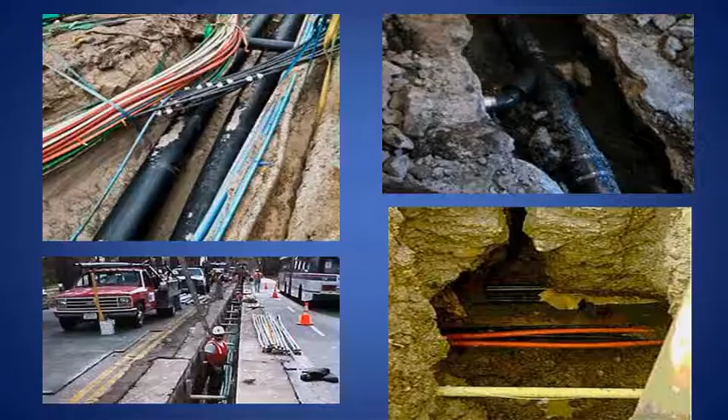The underground infrastructure is vast and growing, essential to all communities, providing essential services necessary for life, health, and social and business productivity. As the demands and needs of our society increase, so will our underground infrastructure.

So that leads us to: who's protecting our communities? Are we doing everything that we can? Are you doing your job? Most states have enforcement protocols to ensure compliance with the one-call codes.

In Iowa, the enforcement authority is the Attorney General's office. In South Dakota, the authority is the South Dakota One-Call Board. In Illinois, it's the Illinois Commerce Commission. And in Nebraska, the Attorney General's office.

In Iowa, enforcement allows the Attorney General to take any action necessary to enforce the penalty provisions of the Iowa One-Call Law. The following clip outlines the Iowa Attorney General's involvement in enforcing the penalty provisions.

One-call enforcement is one of the duties assigned by the Attorney General to the Environmental Law Division. We take this responsibility very seriously. When followed, the one-call law saves lives, prevents personal injuries, and protects essential utilities, property, and the environment.

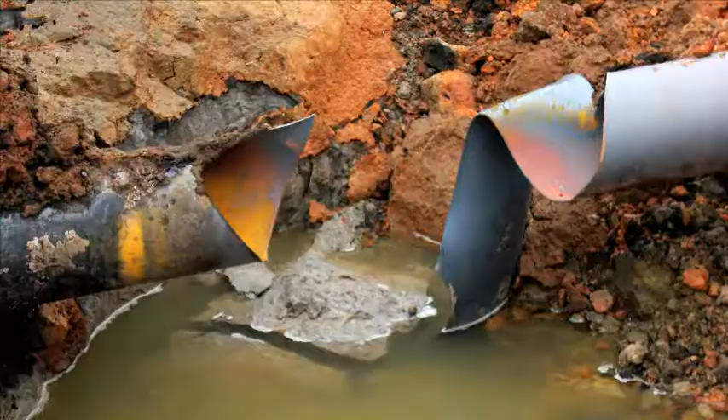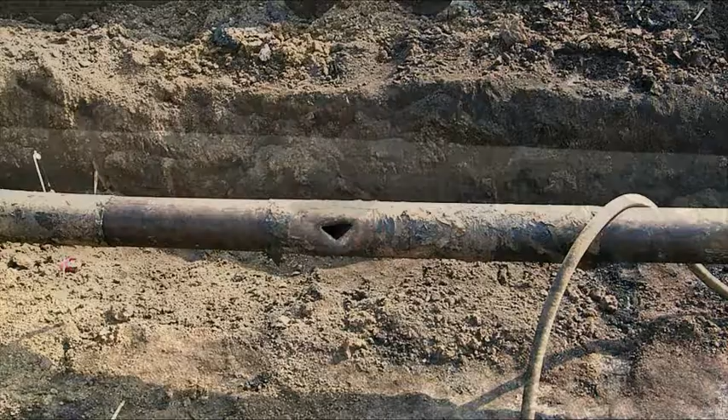Here is why we take this so seriously. One-call violations can have very real and tragic consequences, including explosion of a natural gas pipeline resulting in the death of one pipeline worker and causing another pipeline worker to lose an eye, causing severe burn injuries to an excavator and knocking out natural gas service for an entire city during repairs, causing a fire just outside an apartment building that contained a daycare center for small children, or damage to a hazardous liquids pipeline resulting in the release of thousands of gallons of gasoline near a trout stream and cleanup costs totaling more than $500,000.

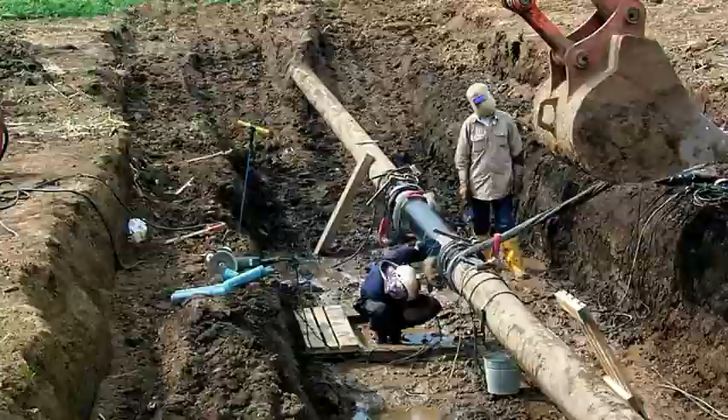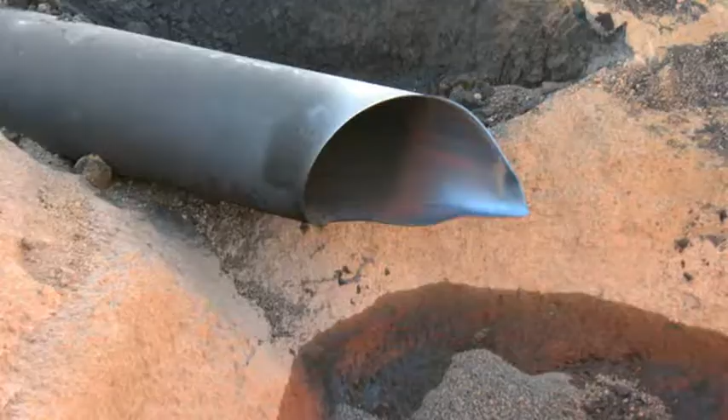Unfortunately, in 2012 we had two more tragic examples. On April 25, an excavator failed to provide 48 hours notice of excavations to install drainage tile in rural Plymouth County. The tile plow hit and ruptured a 24-inch diameter natural gas pipeline, resulting in a massive explosion and fire.

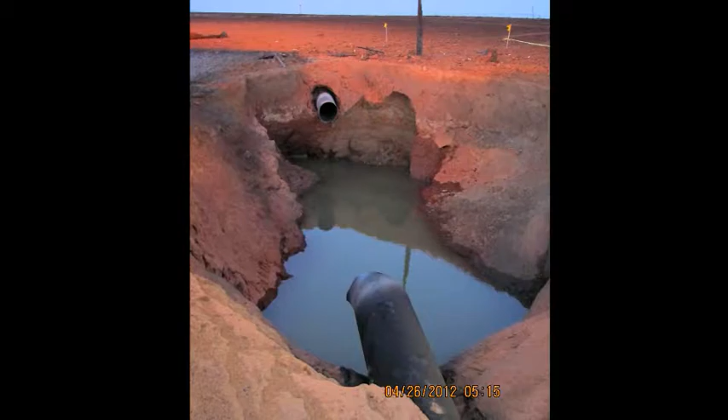This created a large crater 100 feet long, 35 feet wide, 30 feet deep, scorching 80 acres of farmland, destroying the tile plow and bulldozer, destroying an overhead high-voltage power line, causing substantial property damage to the pipeline, and injuring two employees who were hospitalized. One week later, the same excavator conducted another excavation to install drainage tile a quarter mile from the former site, again without providing 48 hours notice.

We filed suit, and the excavator paid the maximum civil penalty for the two days of violation, $20,000, and agreed to a permanent injunction.

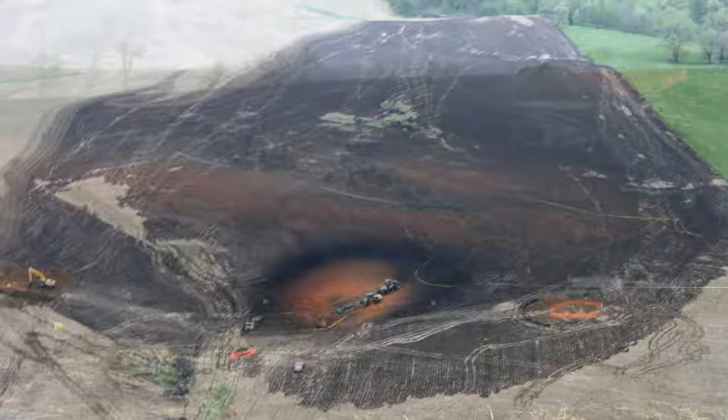On April 27, another excavator failed to provide 48 hours notice of excavations to install drainage tile, this time in rural Jackson County. The tiling equipment hit and ruptured a 16-inch diameter natural gas pipeline, resulting again in a massive explosion and fire, creating a large crater, scorching the farm fields, destroying the tiling equipment, causing substantial damage to the pipeline company. The two employees on site narrowly escaped injury.

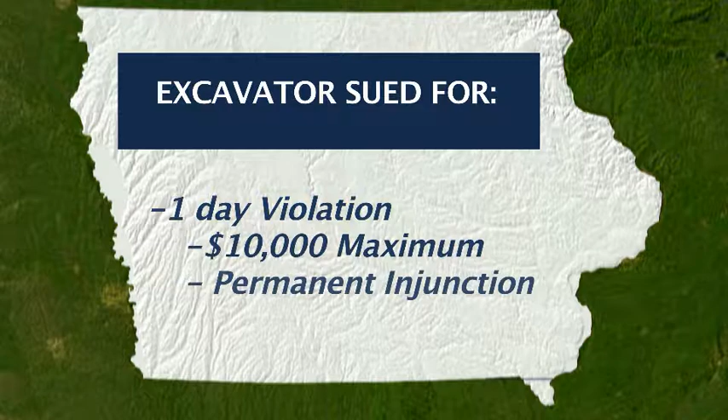We filed suit, and the excavator paid the maximum civil penalty for the one day of violation, $10,000, and agreed to a permanent injunction. These are just a few examples of the tragic consequences that can occur when excavators fail to comply with the one-call law.

We trust that most of you attending this important program are familiar with the one-call law and fully comply. Our only hope is that these brief comments will serve as a reminder to everyone of the importance of this law and the potential consequences, legal and otherwise, when the law is violated. The Attorney General's office will do its part as needed to ensure compliance. Call or be called. Thank you.

Each of the states that you work within take damage prevention very seriously. It's important to remind everyone just what it is that's at stake.

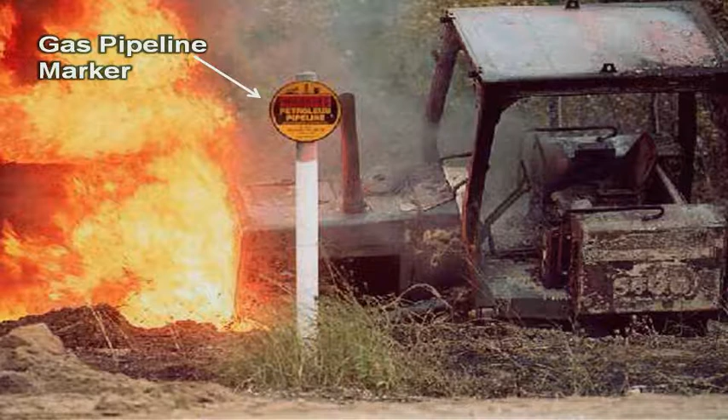Here we have a situation where there's a bulldozer in the same proximity as a pipeline marker. This should never have happened. When you get to the job site, slow down, pay attention, look at your surroundings, and be careful. Safety begins with planning, and it ends with safe protocols at the job site.

You play a vital role in safety and damage prevention, in safeguarding communities, in protecting life, health, and the environment, and preserving the essential services infrastructure. Protecting underground facilities means taking all the necessary precautions.

But the very nature of underground facilities is that they're buried. They're out of sight, they're out of mind. You can't see them. So it's imperative that we all understand the potentials, understand what types of underground facilities are in place, understand and respect the underground facilities infrastructure by being prepared and being alert. Literally, there's more than meets the eye.

In the following video, we'll take an in-depth look at one of our most essential underground services. Des Moines Water Works does about 30,000 locates every year, and we take every one of those locates very seriously because we know that every one of those jobs can result in a dig-in if we don't do it properly.

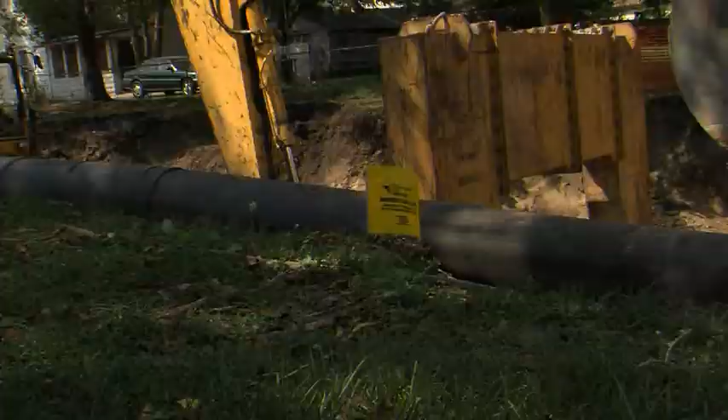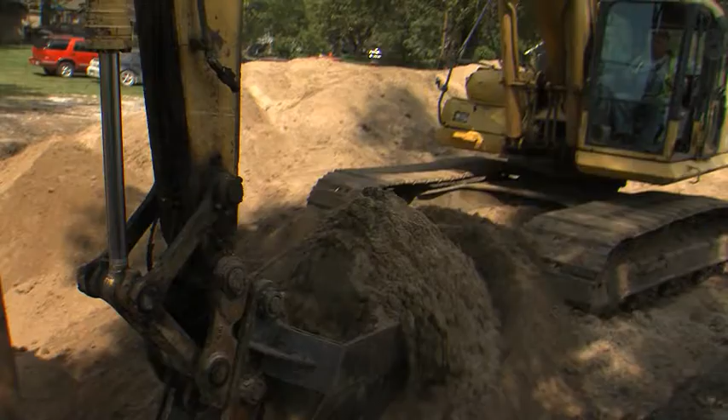Sometimes we have the impression that contractors have more respect for gas or electric markings because of the potential danger, or fiber markings because of the potential cost of the repair. But from our perspective, water should be one of the largest concerns because of the public health implications.

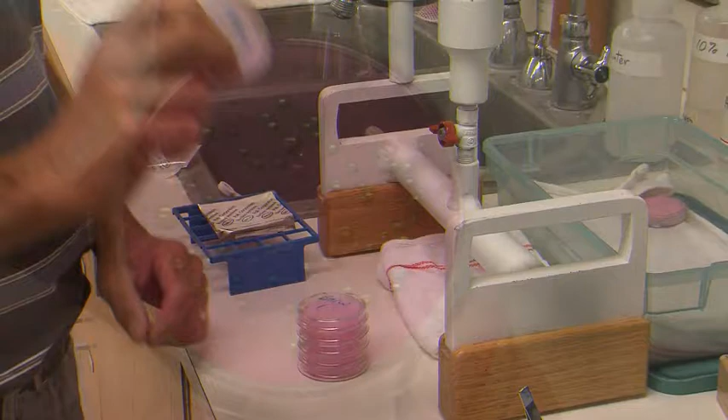Water is the only essential service that we deliver to customers that they actually consume. We routinely test water samples taken throughout the distribution system. What we look for is a group of bacteria called coliforms, of which E. coli is one. These types of bacteria are indicators of sewage contamination.

But the things that people don't always think about are the potential for contamination. If you dig into a water main and it fails catastrophically, it's very likely that contaminants are going to get into that main at that point when we shut it down.

More importantly, though, it's very likely that you're going to depressurize a large portion of the system, and when that happens, there's tremendous potential for backflow or back siphonage, which is actually drawing potential contaminants out of homes, out of businesses, through their service line by a vacuum effect on the water main, drawing those contaminants into the distribution system at points far from the actual point of contact.

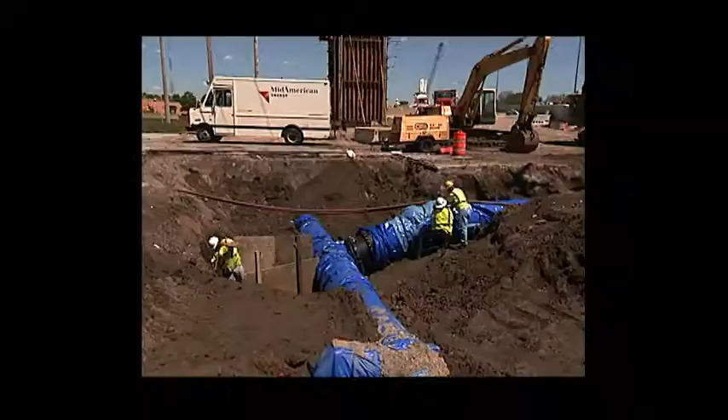The distribution system is a network of underground infrastructure pipes that are at risk at times due to activities within the distribution system. Once damage does occur, the primary threat is depressurization of the system and subsequent contamination that could occur.

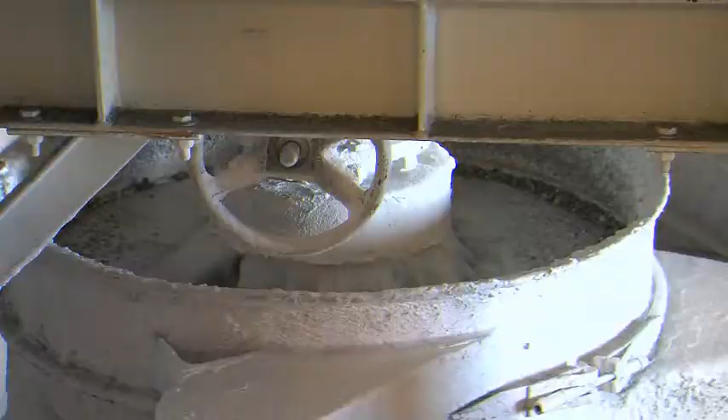Des Moines Water Works treats Raccoon River water as our source water, which is far from potable when we start with it. We put that water through one of the most robust treatment processes in the country because it starts out such poor quality.

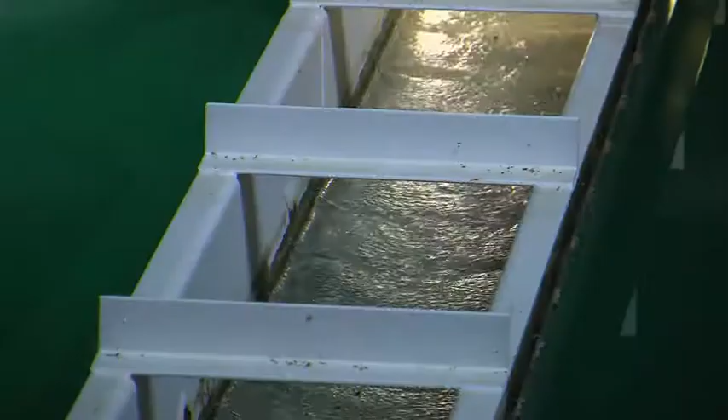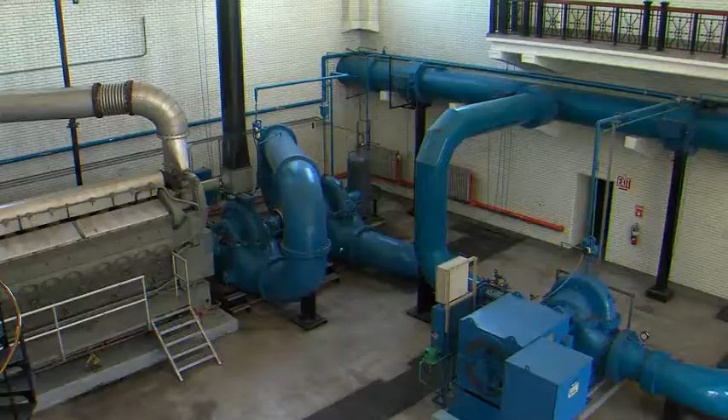We're standing inside softener number 1 at the McMullen Water Treatment Plant. Target pH today leaving the softener is 10.6. With a pH of 10.6, we can expect and anticipate an effective kill of microbiological activity. From a water treatment perspective, this is one of the final steps of the process. Treated water, ready for human consumption, is pumped from this facility into the distribution system.

That network of buried infrastructure has discharge pressure ranging anywhere from 105 to 125 psi leaving this station. Everything we do in the distribution system, from the design of the facilities to the construction, installation, operation and maintenance, the locating of those facilities for other contractors, everything we do is with the goal of ensuring the quality of the water when it's delivered to our customers.

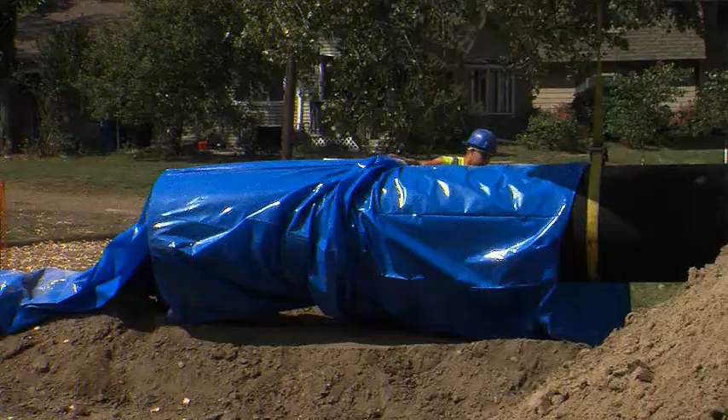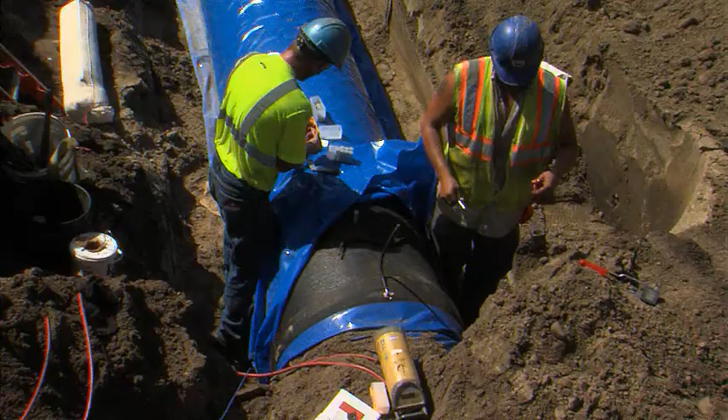We go to great lengths to ensure the life expectancy of our facilities. We use non-corrodable materials, we use polyethylene encasement on iron pipes, we use cathodic protection systems on iron or steel pipes to ensure that the facilities will last as long as they can.

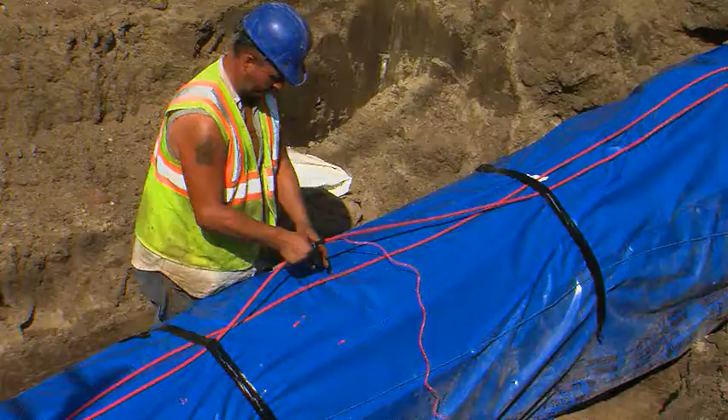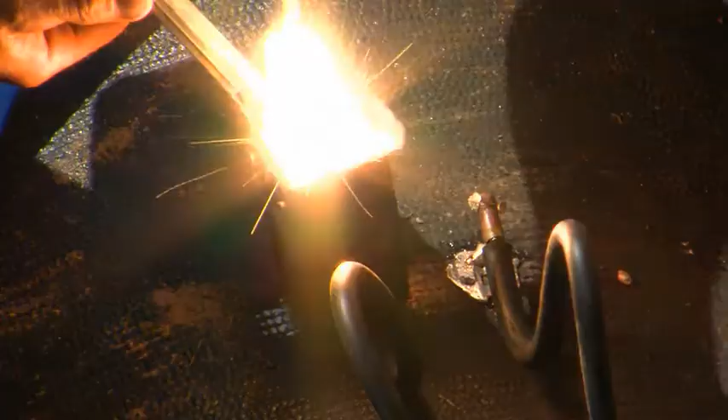When we install iron pipe, we cover every single inch of that pipe with polyethylene encasement to protect it against corrosion. In addition, we attach magnesium anodes to the pipe every so often to act as sacrificial metal in the ground to prevent that pipe from corroding. They actually weld the anode lead from every anode directly to the pipe using an exothermic weld process, just to ensure long service life for that pipe.

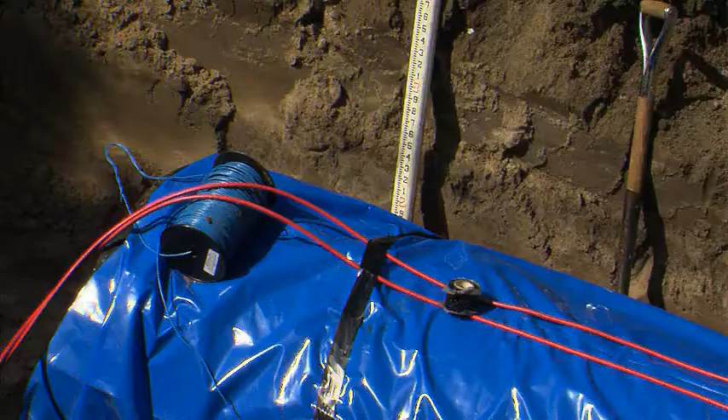If that poly wrap is damaged, if one of those anode leads is broken, it renders that system unusable and dramatically shortens the life of that facility. There are a lot of little things within that system that people might not even think about, like the tracer wire. It's not the pipe, nothing's going to leak if you break the tracer wire, but it makes it impossible for us to locate that facility the next time for the next person who's going to dig.

Water can be incredibly dangerous, especially if it's a large main and they're working below grade in a trench or something. If they damage a large main in an area where there's high pressure, that trench or excavation is going to fill with water almost instantaneously. We have had contractors and their employees very nearly drown before they could get out of the excavation when they hit a water main. That's something not everybody thinks about, but it makes it clear that paying attention to the water marks is just as important as paying attention to the gas or electric marks.

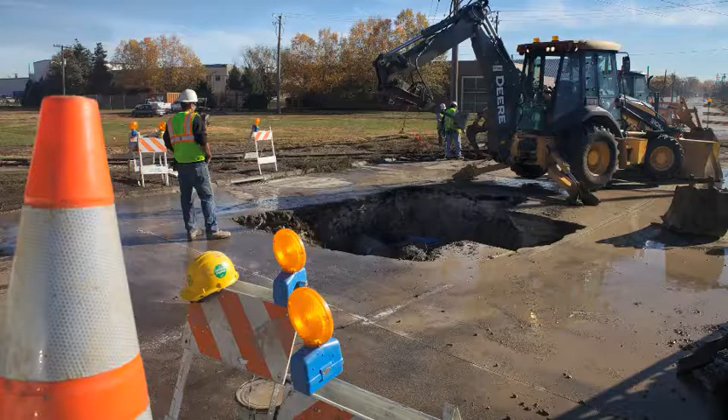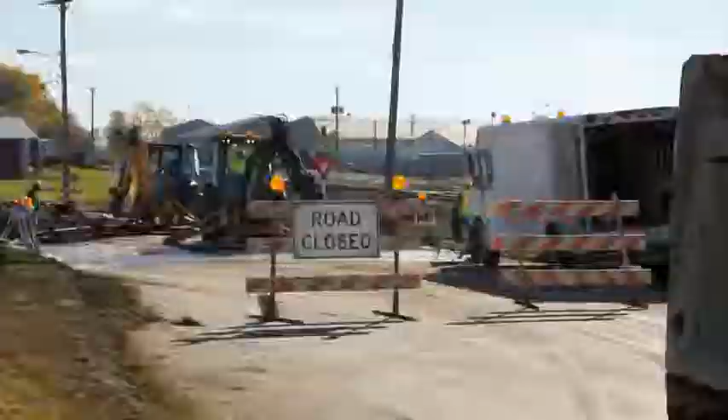If there's a dig-in, the most important thing is for the contractor to let us know. We'll respond, we'll fix it, we'll take care of it, but it's a big job. We have to shut the system down, which inconveniences the customers. We have to excavate typically to make the repair, make the repair, flush, sample, and communicate with the customers. There is a cost to that, and the contractor will likely bear that cost.

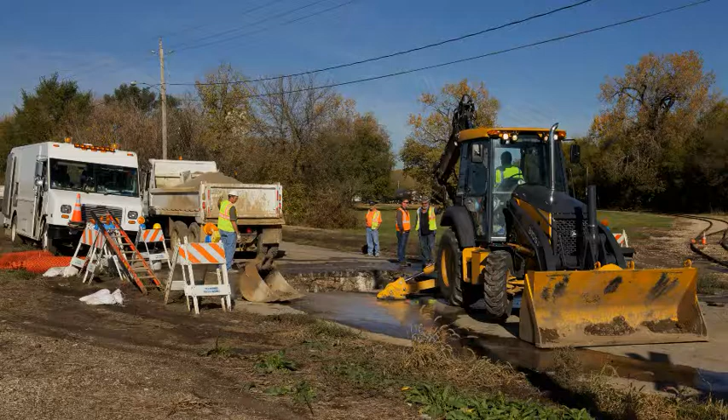We don't want that to happen. We want to do the locates, do them properly, have the contractors work with us, and be careful. It's in everyone's best interest.

Clearly, there is more than meets the eye when it comes to delivering potable water to 400,000 plus central Iowans. We invite all contractors working on or near the distribution system to join us in our effort to protect public health.

There is more than meets the eye, and we play a critical role in this industry in protecting what really matters. You can make a difference. We have to make a difference.

Who else will? When it comes to the Iowa one-call system or your state's one-call system, it begins with planning, calling 811 before you dig, waiting the required 48 hours or the required timeline within your state, protecting and preserving the markings, respecting those markings, limiting unnecessary relocates, and requesting reasonable locates.

In Iowa, a reasonable locate is 10 addresses within the same 100 block, 3 contiguous blocks in an urban area, or up to 1 mile in a rural area.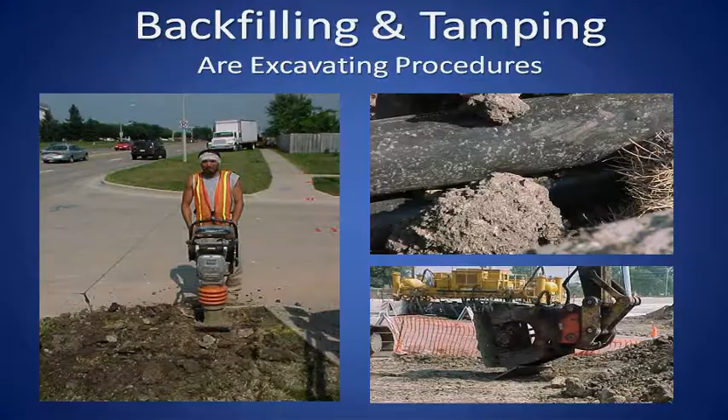When you reach the backfilling and tamping stages, your excavation is not over yet. Backfilling and tamping, as you saw per code, is still part of that excavation. You want to be very careful to put clean backfill in. Avoid anything rough, any hard clay material, bricks or concrete or rocks, because that can damage the facilities as well. Tamping above an underground facility has to be done with precaution.

Directional boring is an important technology, an important tool that we use in this industry, but it requires additional precautions. You must verify the depth first and leave additional room for the pullback. Tracking the bore head at all times is essential during the actual drilling and during the pullback process.

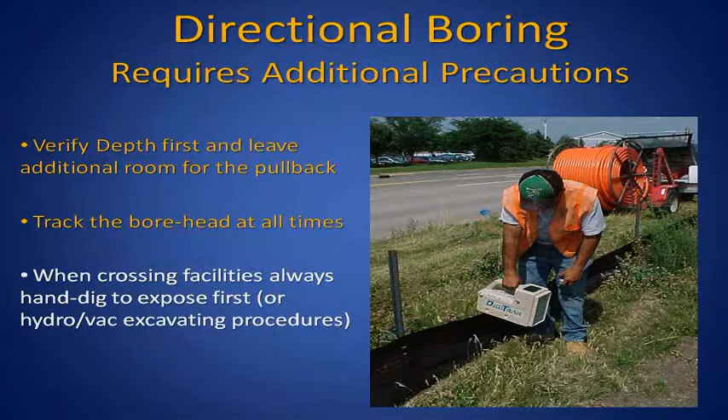And when crossing facilities, always hand dig to expose those facilities first, or use other accepted means such as vacuum or hydro excavating procedures. It is critical that you know your area of proposed excavation prior to making the notice to your one-call system. Identifying the dig site properly is essential.

Remember, not all developments are mapped. State laws require the underground facility operators to provide a database, a mapping of where their facilities are located. But what's slower to come into the system are the actual geographic databases. You may have a new plat development, a new piece of land was annexed in. So don't always assume that that general information, that geographic information is on hand.

You must be prepared to use and provide detailed information, such as landmarks, rivers, buildings, major streets and intersections, mile markers, or other types of boundaries. If you have a GPS receiver, your one-call system will take a GPS latitude and longitude coordinate.

Locates outside of a city in Iowa require that the county, township, range, and section number be provided. This information can be found in many locations, including plat books, the assessor's office, or the Iowa Department of Transportation's website. This is all part of the planning process, identifying that information prior to making the notice.

If you find yourself in the field and you don't have that information on hand, you can actually call the reference desk of your local library, tell them what city you're in, what county, and they'll tell you that other information. The various types of locate requests within your states include the regular notice. In Iowa, that's a 48-hour advance notice, excluding Saturdays, Sundays, and legal holidays.

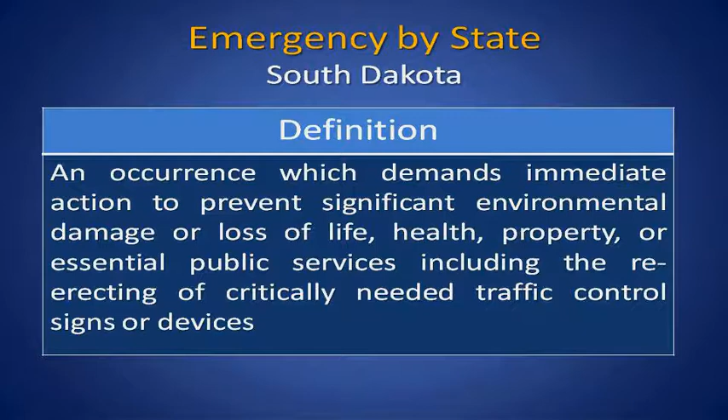In South Dakota, an emergency is an occurrence which demands immediate action to prevent significant environmental damage or loss of life, health, property, or essential public services, including the re-erecting of critically needed traffic control signs or devices. Underground facility operators shall respond as soon as possible, but no longer than 2 hours during the business day and not longer than 4 hours outside of the business day, or by the start time on the ticket, whichever is later.

In Nebraska, an emergency is any condition which constitutes a clear and present danger to life, health, or property, or which demands immediate action to prevent or repair a major service outage. An excavator shall give notification to Digger's Hotline as soon as practical, and the utility members will provide all reasonably available location information to the excavator as soon as possible.

In Illinois, an emergency is a locate request for any condition constituting an imminent danger to life, health, or property, or a utility service outage which requires immediate repair or action. There is a wait time of 2 hours in Illinois, or the date and time required or requested on the notice, whichever is longer. If a member does not respond within 2 hours, call the member company directly or the Julie system in Illinois.

Most state one-call systems provide joint meets, allowing operators or locators to meet with excavators at the dig site. This is used when the area of proposed excavation may be too large or complicated to explain to the call center representative. This is where information can be exchanged, such as maps, plans, or schedules. It is very important that operators, locators, and excavators cooperate with each other to accomplish their work in an efficient and coordinated manner.

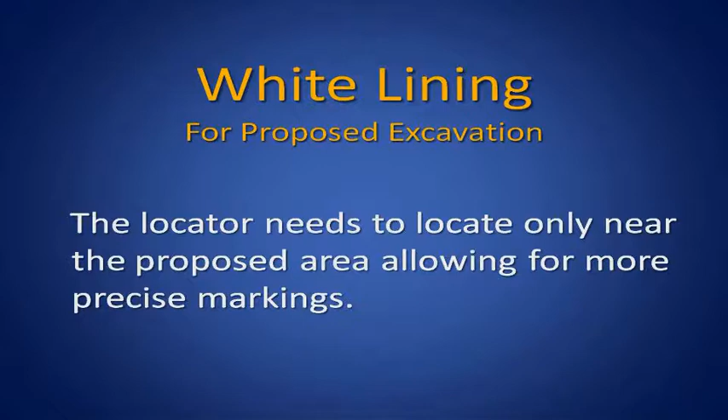White lining is an important tool for excavators to use when identifying their area of proposed excavation. White is part of the American Public Works Association's color codes, with white indicating the area of proposed excavation. Think of white lining as a tool for safety, where the locator needs to locate only near the proposed area, allowing for more precise markings. White lining saves time for the locator and allows them to respond to your job even sooner. The bottom line to white lining is it provides better communication between excavators and locators. National statistics show that white lining reduces excavation-related damage.

As an excavator, you must call in your own locate request. You'll want to write down information for reference, including the dig ticket number, the facility operators that were contacted, and any other pertinent information about the job site. Never rely on someone else's locate markings. Make your own locate notification to Iowa One Call. Now, if you work within a company, a legal entity, it's okay to share a locate request. What I'm talking about is if you're a subcontractor, don't share with another contractor. If you're an excavator working in a residential market, don't allow the homeowner make the call for you.

You want to have that information. The law requires the excavator doing the work to make that notification to the One Call system. You'll be expected to provide valid contact information.

Iowa law requires that the excavator doing the work provide a contact telephone number that is accessible at all times throughout the excavation. Regarding the excavator and the markings, the excavator is responsible for preserving the markings at all times throughout the excavation. That requires respecting the markings.

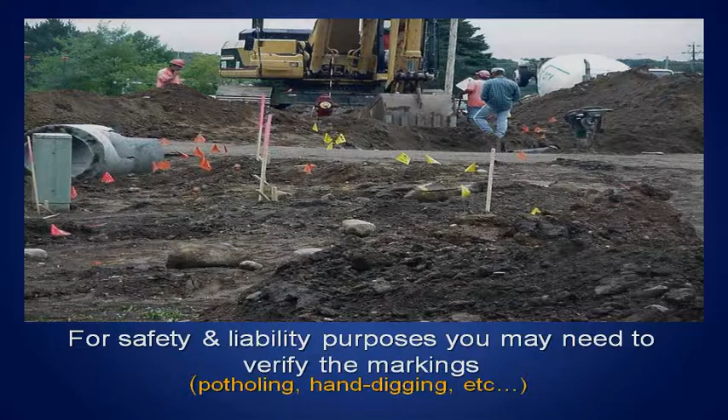Validating the locate markings is a critical component of damage prevention. For safety and liability purposes, you may need to verify the markings. In this slide, you've got orange communication markers on two sides of the excavation with gas markings running into a fire hydrant. If something doesn't look right, don't take it for granted that it is.

There are times when you will be required to expose facilities. In Iowa, law states, if, in the opinion of the operator, the planned excavation requires that the precise location of the underground facilities be determined, the excavator, unless otherwise agreed upon between the excavator and the operator, shall hand dig test holes to determine the location of the facilities unless the operator specifies an alternative method.

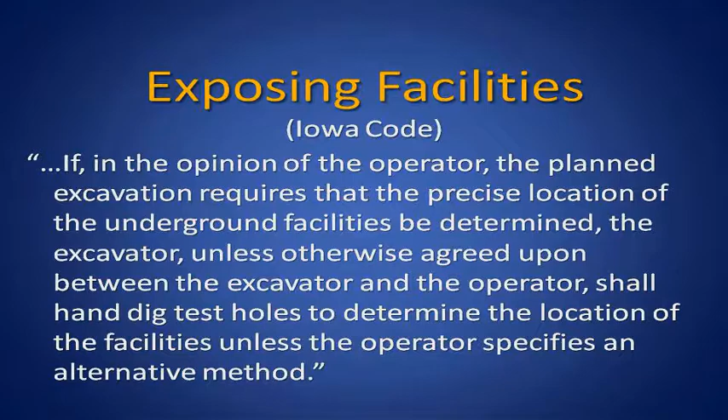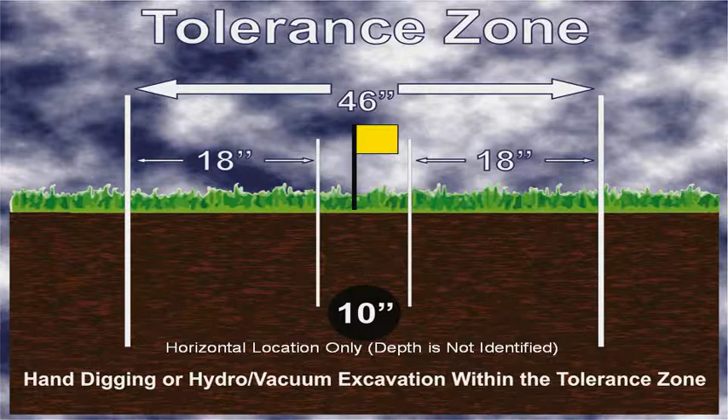Alternative methods may include hydro or vacuum excavation. In each state, the tolerance zone refers to the horizontal location of an underground facility and includes a predetermined distance on either side of the facility. In Iowa, that distance is 18 inches on either side of the facility.

Oftentimes, this area, the tolerance zone, is referred to as the hand dig zone. There is no mechanized equipment allowed in the tolerance zone unless it's accepted means such as hydro or vacuum excavation. The following video highlights excavating practices within the tolerance zone.

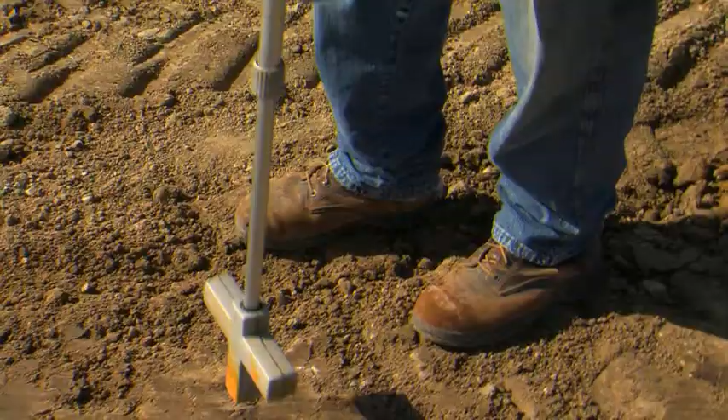Underground utilities are, by their very nature, unseen to the human eye, and as such, they are highly susceptible to excavation damage. Now, I think we all understand that under Iowa law, we are required prior to doing any excavation to call Iowa One Call and provide the utility company an opportunity to place marks or flags indicating the location of their underground facility. However, in some cases, those marks or flags aren't enough to make sure that that facility is safe.

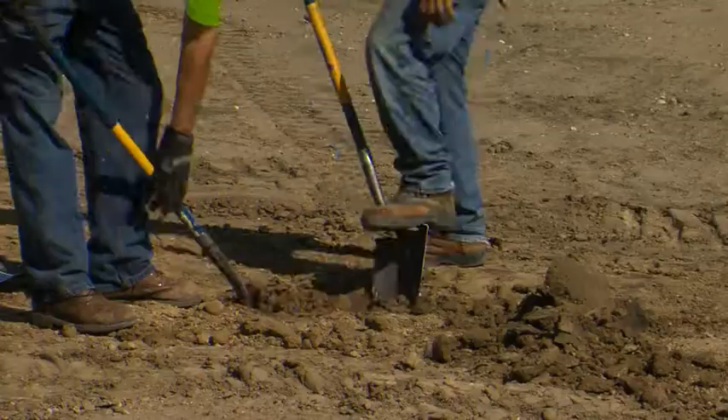And so Iowa law also allows utility companies to require that an excavator determine the precise location of the underground utility by performing test digs or excavations. These test digs or excavations can often be done by hand digging, hydro excavation, or vacuum excavation.

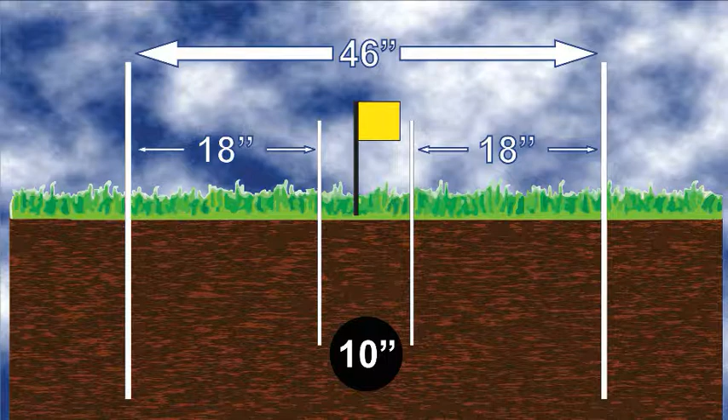Iowa's One Call law defines a horizontal location as a space of 18 inches on either side of an underground facility. This area, which is referred to as the tolerance zone, includes the width of the facility plus 18 inches on either side. It is always important to consider that additional 18 inches.

Excavators should always respect and preserve the above-ground markings since they are a critical reference point. Hand digging within and near the tolerance zone is a common and accepted industry practice. Utilizing the right technique, this can be a very efficient process.

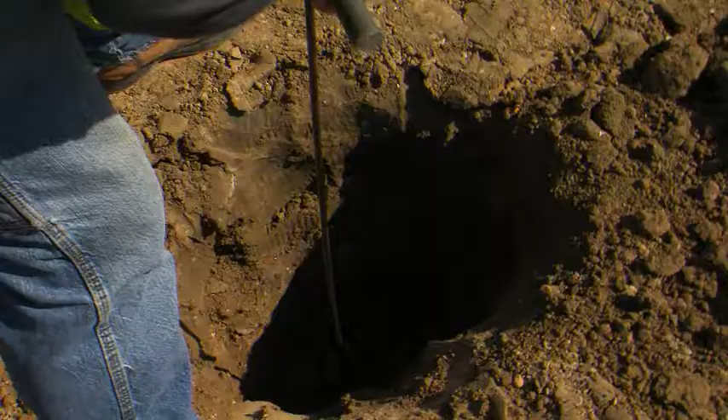Hand probing is always an important procedure when exposing facilities, allowing the excavator to determine the progress and to avoid digging into the facility with the hand shovel. Using blunt-tipped probes also reduces the likelihood of damaging a facility.

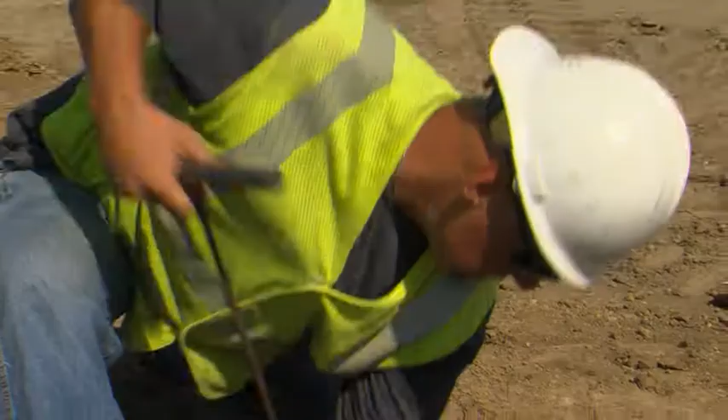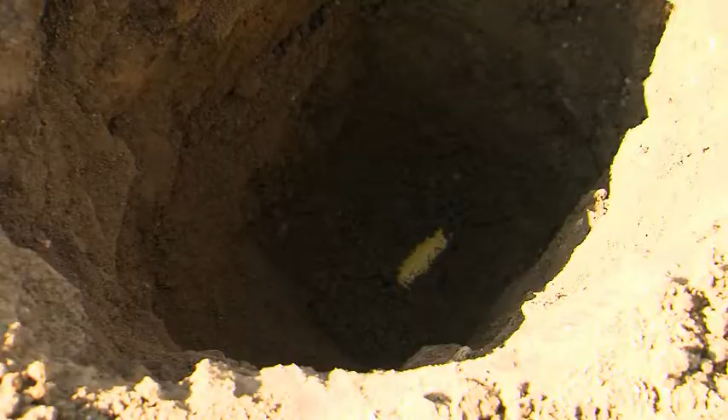Once the facility has been exposed, a visual verification can be determined and recorded. Obviously, when you can see something, you can avoid it. Continued potholing may be necessary or required if the excavation will continue beyond the point where the facility has been initially exposed.

As one of the state's largest utilities, MidAmerican routinely performs hand digging to expose underground utilities. While this takes extra time and effort, it's an important part of our damage prevention program. In the long run, this extra effort saves both time and prevents costly damage.

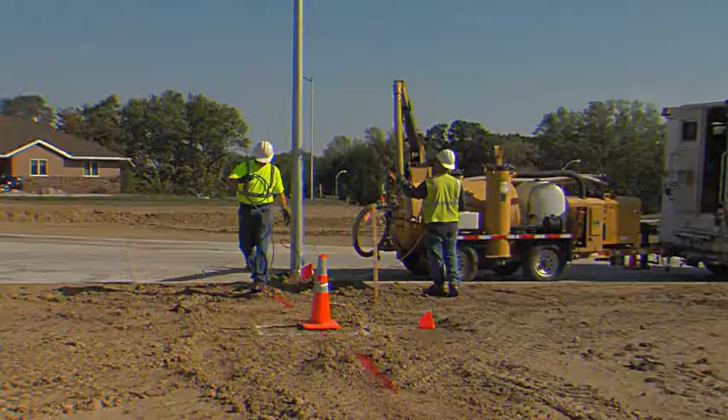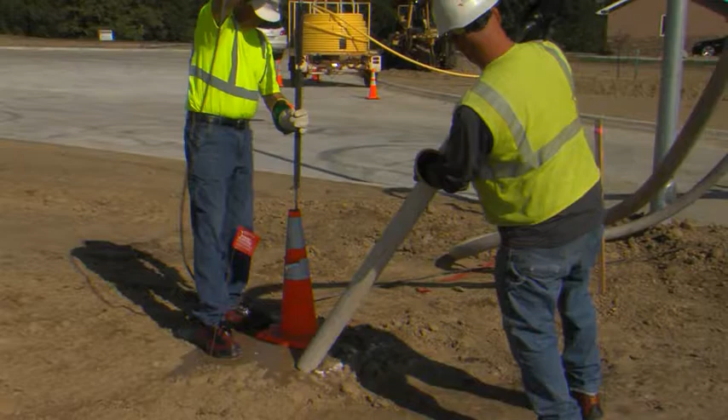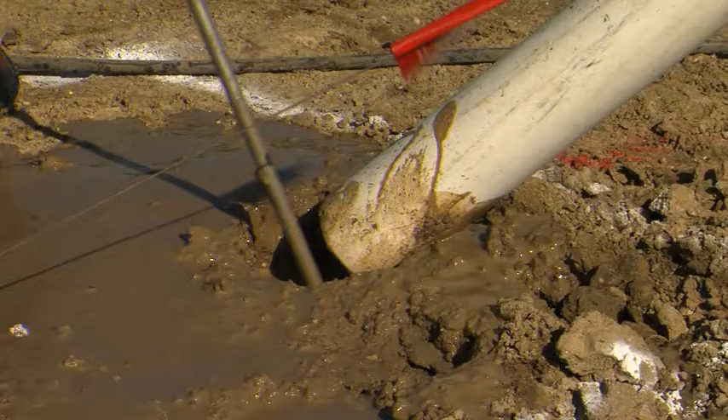There are times when hydro and vacuum excavating, an approved procedure for exposing facilities, will be a much more efficient and overall effective method. Above-ground markings should be maintained as reference points for determining the tolerance zone. Working together, a two-man crew can make efficient use of this procedure, saving considerable time. Techniques such as using a warning cone to reduce splatter can be most effective. The combination of high-pressure water and vacuum suction results in a safe and efficient method for exposing facilities inaccessible or too difficult to access via hand digging.

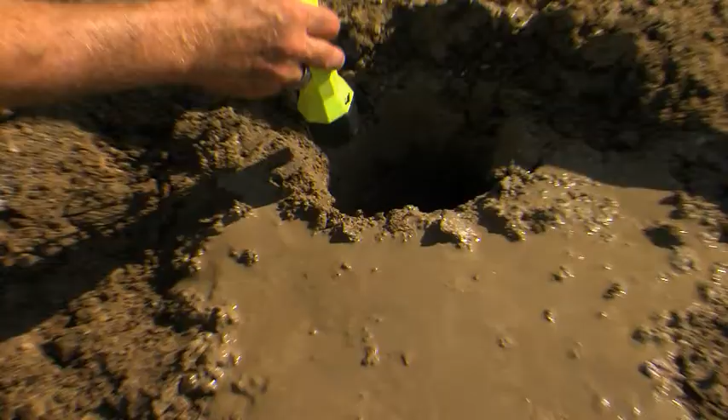Once visual verification can be made, an accurate measurement of the depth can be made and recorded.

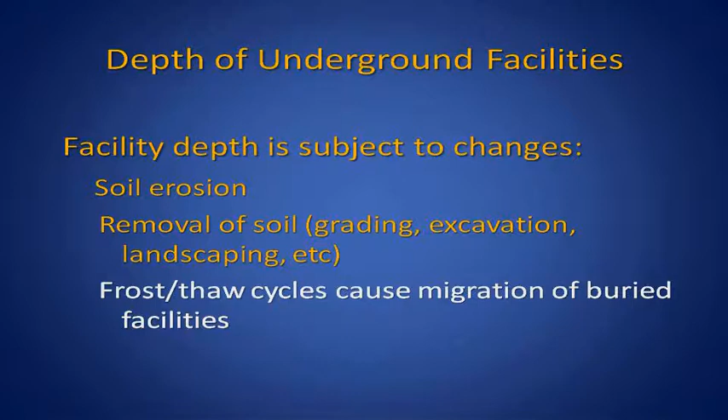Ironically, an unknown in our damage prevention industry is the depth of the underground facility. Locate markings indicate the horizontal location only. Determining depth actually requires exposing the facilities. Installation codes mandate depth requirements, and facility depth is always subject to change through soil erosion, removal of soil through grading, excavating, or landscaping, and also through frost and thaw cycles, which can cause buried facilities to migrate towards the surface. Because exposing facilities is critical to knowing precisely where they're located, the placement of facilities deep into the ground via directional boring can be very problematic and cause delays.

While there are general consistencies between state one-call systems, there are differences, and it's important that excavators understand them. Regarding ticket expiration per state: in Iowa, locates are good for as long as the original markings are preserved or if suitable reference points have been established. The markings must be applied in a manner that will last a minimum of 10 working days on permanent surfaces or 5 working days on non-permanent surfaces. If the excavation will last longer than such periods, the operator shall provide re-marks at the request of the excavator.

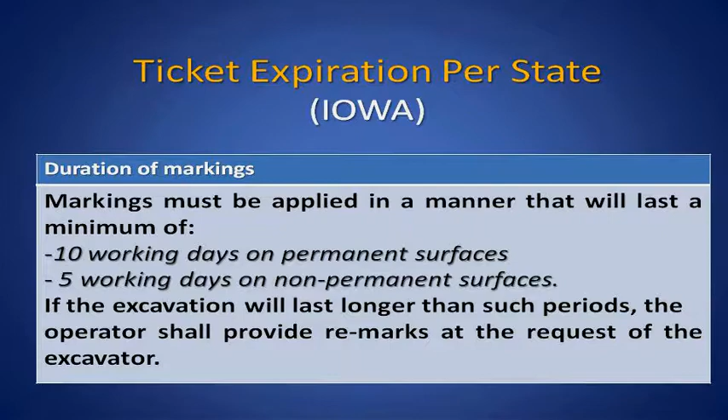In Illinois, there is a specified expiration timeline of 14 days, and excavations lasting longer require new locates. Remarking will be provided if original markings are destroyed. In South Dakota, markings should last a reasonable timeline as permitted by conditions, with remarking provided at the request of the excavator. In Nebraska, the expiration timeline is 10 business days on permanent surfaces or 5 business days on non-permanent surfaces. If excavation will last longer than 5 days, remarks will be provided upon the excavator's request.

Reporting any instances of damage to underground facilities is a critical component of safety. In Iowa, an excavator shall, as soon as practical, notify the owner-operator when any damage occurs to an underground facility as a result of excavation. If that damage results in an emergency, the excavator must notify 911 emergency services. Federal law requires that all excavators notify 911 if the excavation damage results in the escape of any flammable, toxic, or corrosive gas or liquid.

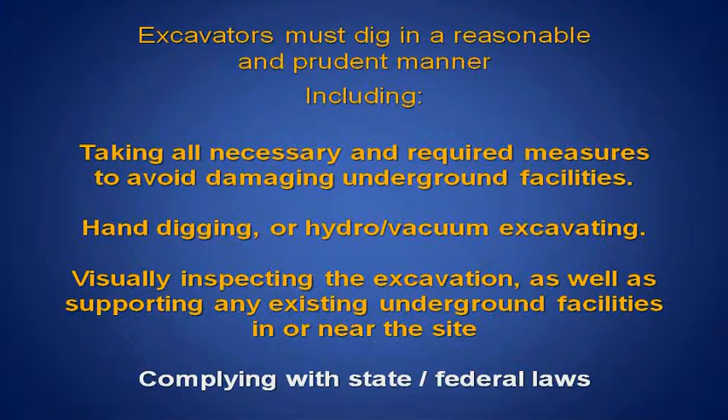MidAmerican Energy's reasonable and prudent practices state that excavators must dig in a reasonable and prudent manner, including taking all necessary and required measures to avoid damaging underground facilities, using hand digging and hydro or vacuum excavation procedures, visually inspecting the excavation, as well as supporting any existing underground facilities in or near the site. Complying with state and federal laws is always critical and necessary.

In summary, the critical role that you as excavators play has everything to do with protecting what really matters. The rules and regulations of your one-call system are stringent. Your responsibilities are high. There's nothing easy about what we've covered here. It's important that you remember what's at stake. Dig safe, and thank you for attending this presentation.